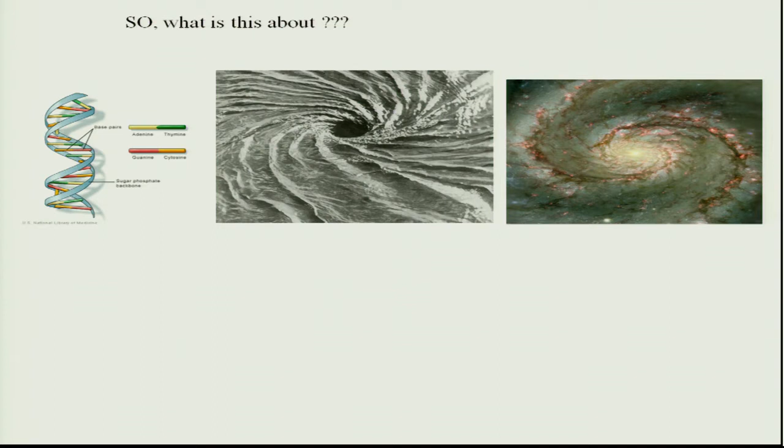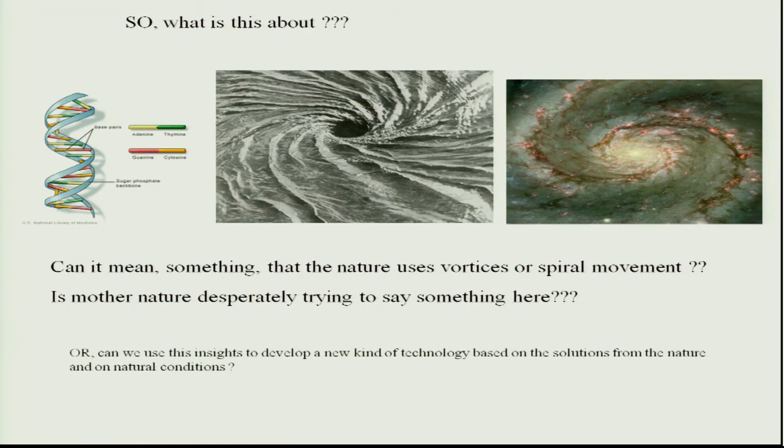And then we look out in the universe to see some of the biggest objects we can observe. They all have one thing in common, namely the vortex movement. So we started to think, is Mother Nature trying to tell us something? Why is Mother Nature using the vortex as some kind of general design principle? Or can we use these insights to create a new kind of technology that is based on nature, and to create technology that works better in the future with better maintenance?

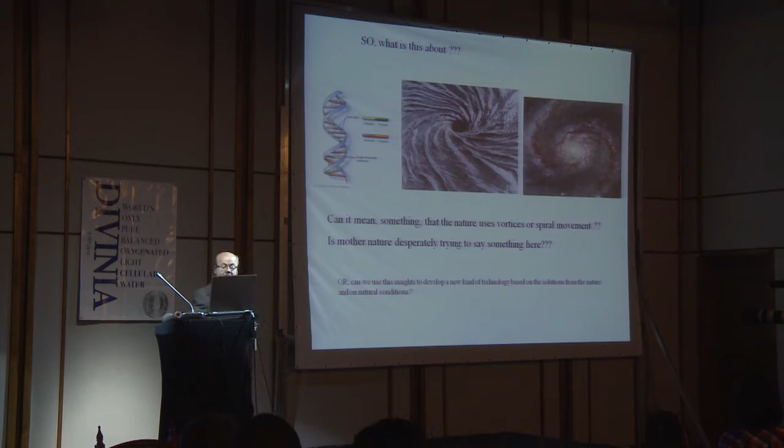So, have you ever drunk tea or coffee? Here's the problem: there is a glass bowl filled with water and a lot of dirty stuff inside it. If you want to clean the water, what should we do? I mean, you can pick them out one by one, but it takes an awful lot of time. But you can also do like this.

I'll start to stir the liquid, and look what's happening. Look at the similarity between this and the spiral galaxies. Here we are again. This means that in this state, it's much easier to pick the stuff out. It's coffee, used coffee ground.

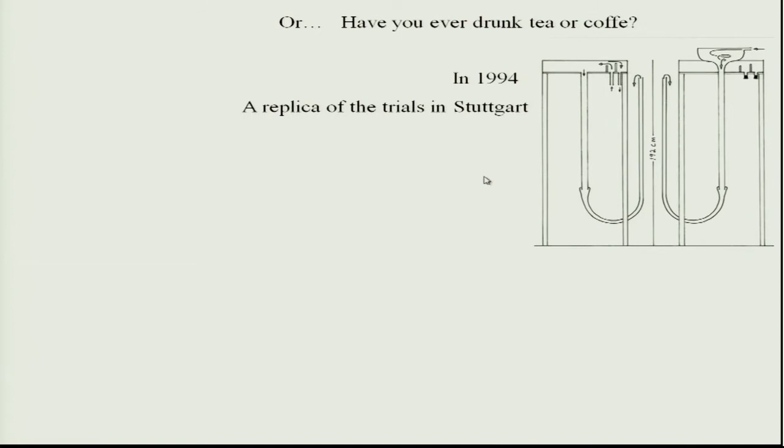In 1994, we started to think we must do something with this. We must make a replica of one of these things to see if we might get it to work. This is one part of the famous trials in Stuttgart. We're trying to find out, does the vortex shape itself on its own, or does it need a bit of help? The answer was that the vortex is actually creating itself. It's a kind of self-organization system.

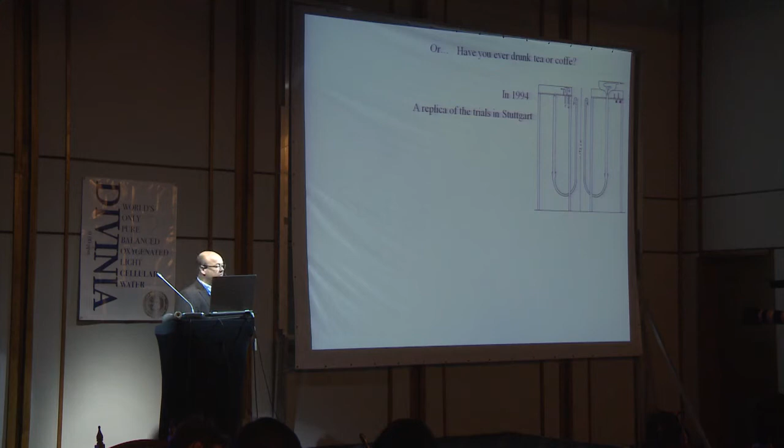And then we have a small tube attached in the center. You apply a very little underpressure, and they link together. So you're actually able to pick out most of the stuff in the water through the tube, and what's coming out afterwards is more or less clean water. If you do it more times, you're sort of polishing the water.

So then we invented, or named, something we call VPT. VPT stands for Vortex Process Technology. And the idea behind it, as I said, is to study nature, how nature does things when it does technical things.

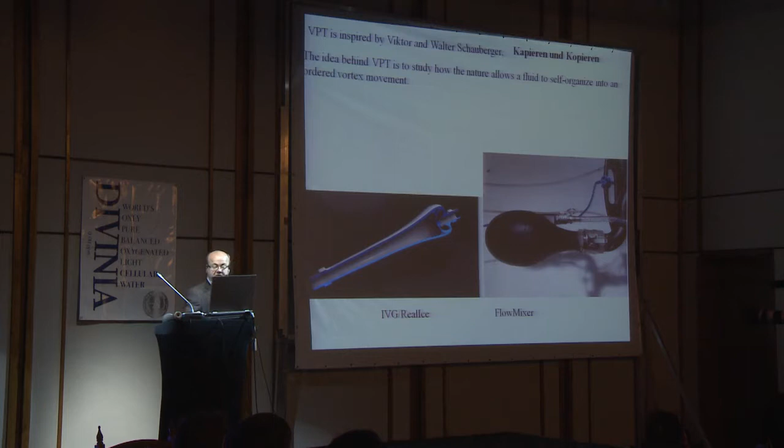It's also fundamental in nature. We saw that you can find it almost everywhere, from our smallest things to the biggest things out there.

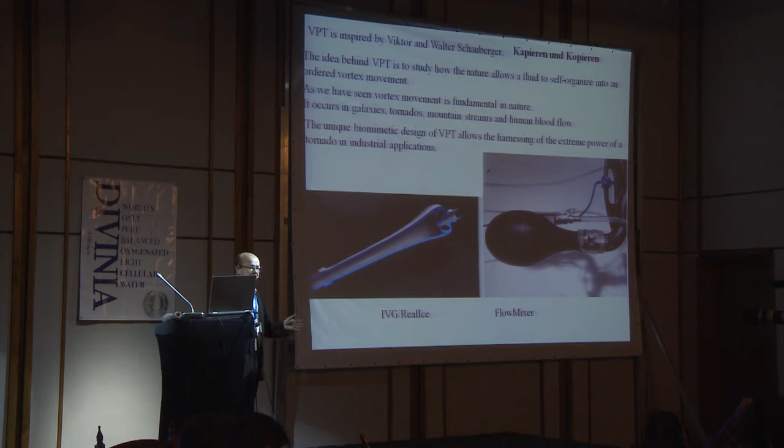And also, this biomimetic design allows us to harness the extreme power of a tornado for industrial applications. We just say it might even be able to use this with air. Suppose you can tame a tornado and extract the energy from that. Wouldn't that be cool?

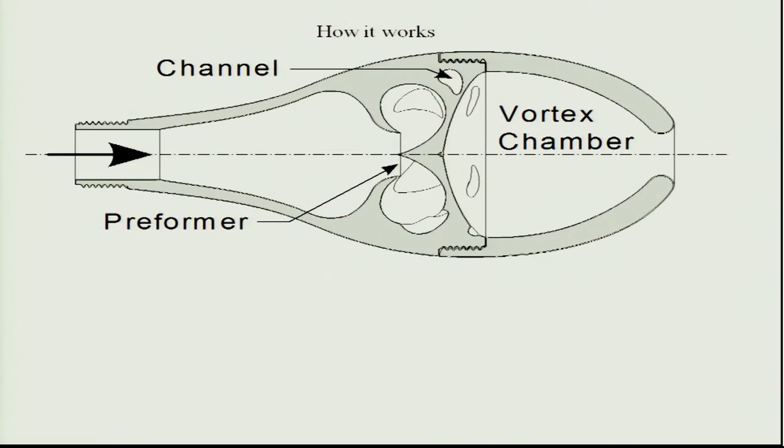This is how it works. You have the water coming in from beneath. It meets this sharp point. It flows out in a torus-like form. It starts to circulate, it goes into the canals and goes out here. We have 5 canals, and together they shape a main vortex inside the vortex chamber.

We have different sizes, different sorts of designs for different purposes.

In this case, the vortex comes out here and goes backwards, creating a subpressure in the center. In this case, the subpressure is connected via a small tube up to the air, so this one is running underwater. It's a very efficient way of mixing oxygen or air into water. So you can mix a liquid with a liquid, with a gas, with a liquid, even a liquid with powder.

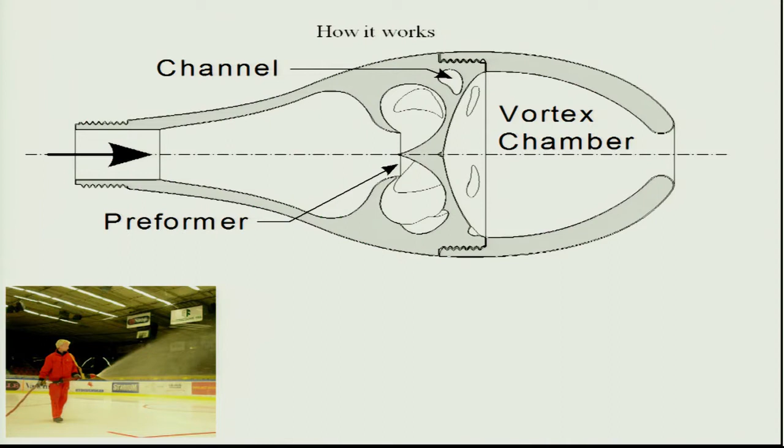And we use it for various purposes, which I will show you later. It could also be used very effectively to spray out things. In this case, to make ice on artificial ice arenas.

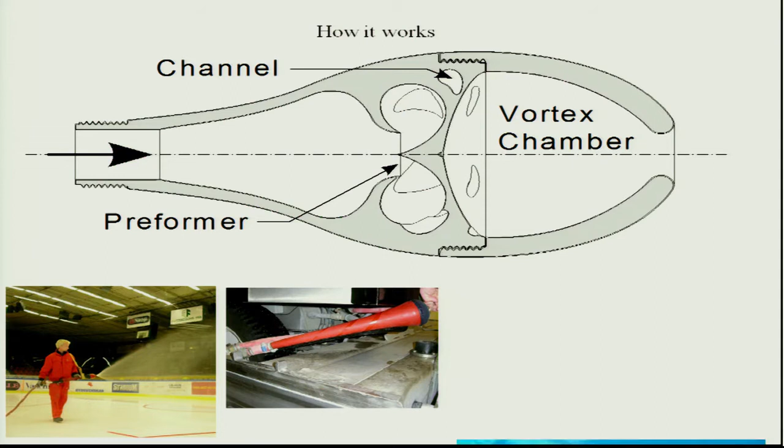And this is another type, a very early version that we put on the machine that goes around the ice when they're fixing it. This is how it looks underwater, where the bubbles are coming out. You can see this little ring is a cavitation ring. The pressure is so low that the water actually rips apart.

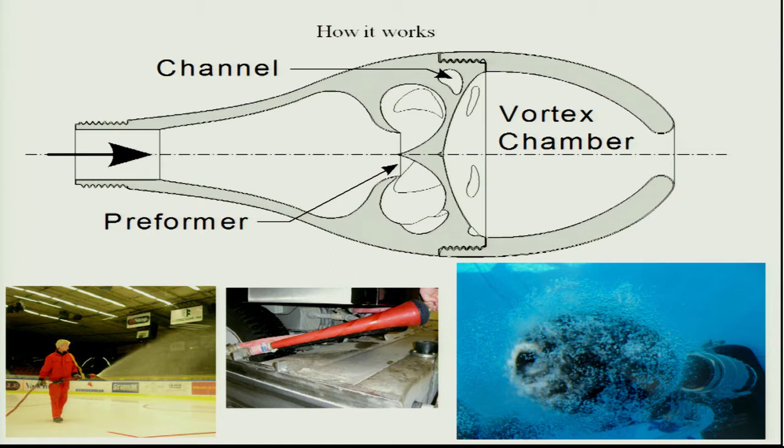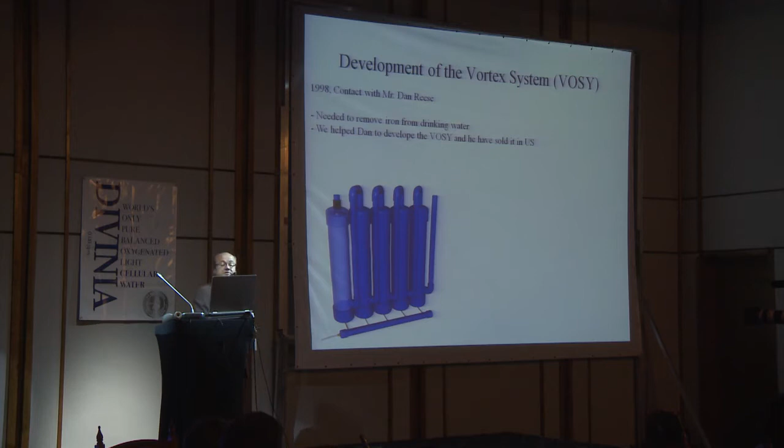Then later on, we developed something we call the vortex system. We came in contact with Mr. Dan Reese from Texas, US. He had a problem: he wanted to remove iron and manganese out of drinking water. He had another system, but it didn't work very well. So we helped Dan develop VOSY, and he has sold it in US ever since.

And this is how it works. Same thing: you have a nozzle up here, the water comes in, starts to spiral inside the tube, and the dirty stuff goes out in the center, and the clean stuff goes out into the next tube. We repeat it 5 times. With this, it's possible to remove around 50% of the iron, depending a little on how bad the water is, and almost 100% of the manganese.

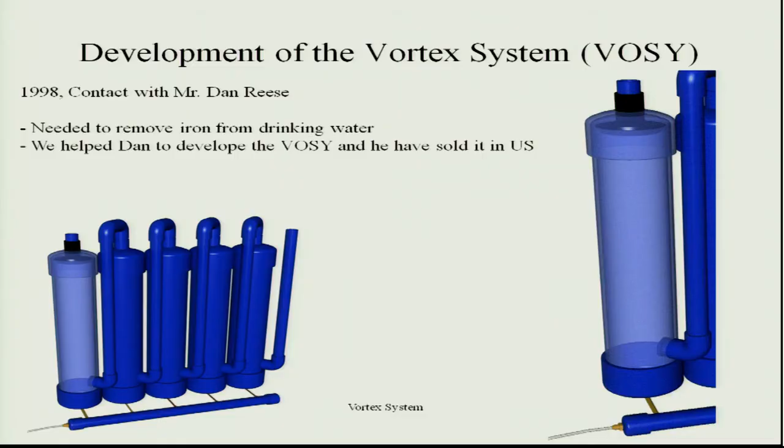So I would say it works with any kind of metal ion. Could be a solution for Fukushima, I don't know, maybe.

We have just tested it with iron and manganese, probably other things like lead or whatever. The reason it actually works so good is that the material happened to be PVC. PVC is strongly electronegative, it wants to give away an electron. Now, the iron that comes in is positive, it wants to have an electron. So when the iron is rubbed against the walls, it steals an electron.

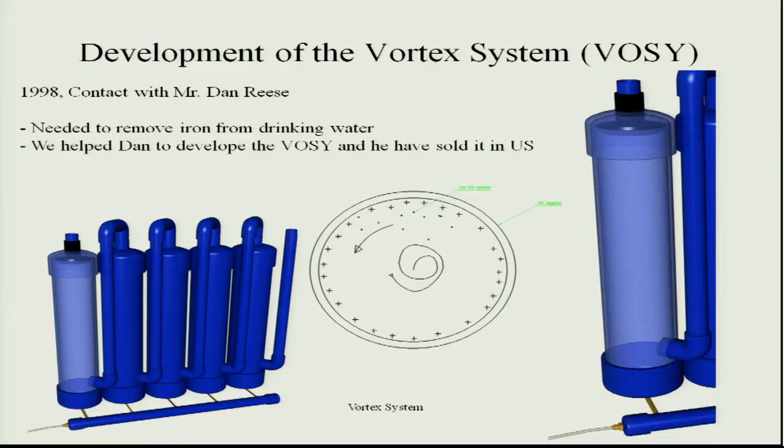After a while, you build up a very strong positive field, could be around 200 to 300,000 volts. Meaning that the next iron that comes in will be sort of repelled by that positive field, and it goes towards the center, where you have the weakest spot. And that's exactly where we want it, because then the vortex takes over and sucks it out.

So this is also a typical way of how nature works. Nature works with many different ways to solve things, but they combine. That's why nature is so effective compared to our own systems.

However, something funny happened. The plants grow better. We got reports from people using this stuff and watering the plants with our water, and they say, hey, they grow better. And we say, what the heck?

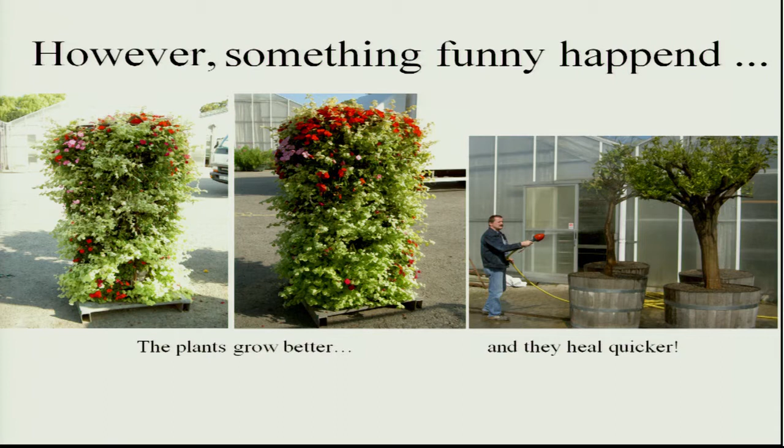You can see we put up something called blomster pillars. This one has been standing beside this one all the summer. This one was watered with ordinary tap water, and this one was watered with vortex water. And you can clearly see that there's a big difference between them.

And also, they heal quicker. My friend Morten here is spraying water on a lemon tree that has some kind of disease, and it healed much faster than they expected it to do. So this gave us something to really think about, what's going on.

And this also led us to make some bigger tests. We have made tests with soil penetration, wetting abilities and solubilities by farming in greenhouses, first in Dubai, where we tested with cucumbers, and in Alnarp, Sweden — Alnarp is a Swedish agricultural university just north of Malmö — with tomatoes.

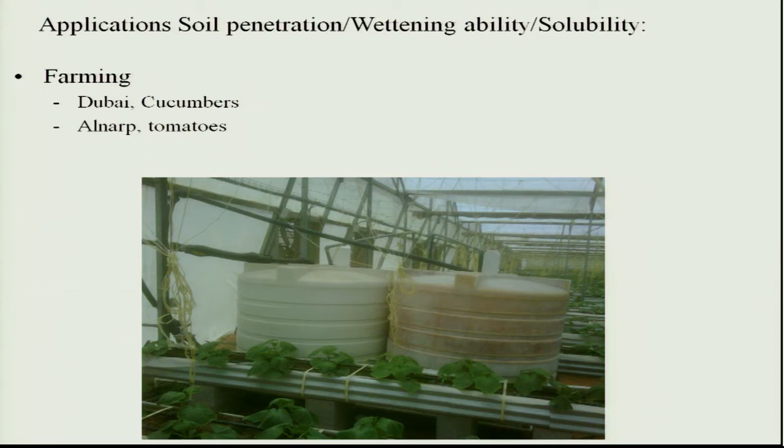The objective was to see if something was happening, and if so, what. This is how it looked in Dubai: basically two barrels of water, one barrel with vortex water, one barrel without vortex water. And this is how it looks at the end of the growing season — this one is with vortex water, and the other one is with non-vortex water.

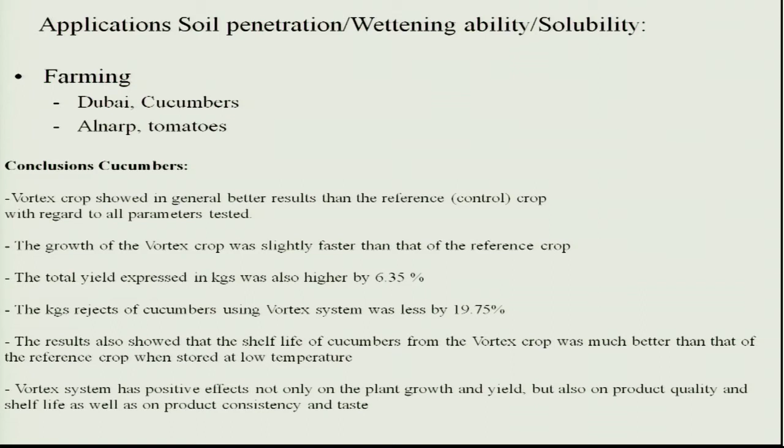And the results were that the crop grows slightly faster with vortex water, but the total yield when they harvested the crops was about plus 6.35%. However, the quality seemed to be better — the number of rejects was less by almost 20%.

And also one other thing that really amazed us was that the shelf life of the cucumbers, when they lie in the shop, is about 20% longer than the other cucumbers.

And in Alnarp, they made a small hydroponic-like test with tomatoes. This girl, Malin, took the seeds and followed them from the very beginning up to 7 weeks. It seems that things are really happening here as well, because her thesis was that nothing would really happen — so there wouldn't be any difference.

But the plant height, the stem width, and the internodal length — the length between the leaves — was significantly bigger in the tomato plants with processed water.

And also, we found out that the vortex water tomatoes seem to be more stress tolerant, because she made an error in the first round. She took the small plants into the big bio chamber when it was extremely light, and they got a light shock. But the plants with the vortex water seemed to recover much quicker than the other one.

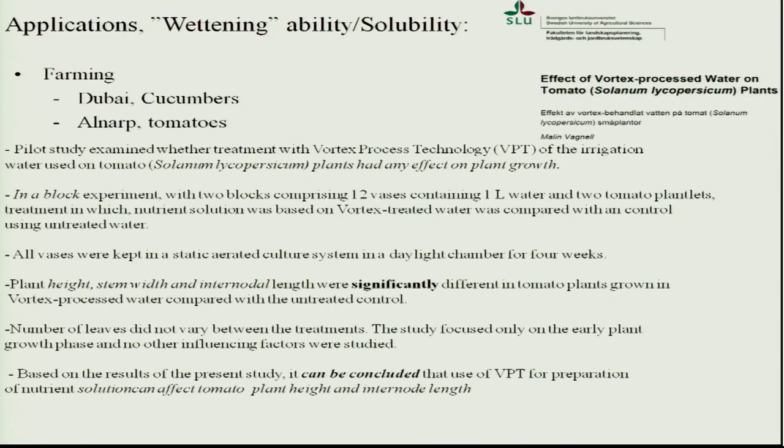And she concluded that, well, if you use VPT for preparation of the nutrient solutions, it can affect tomato plants. So she had to change her mind, which was a victory for us. However, this is a pioneer project that raises more questions than it actually answers.

So there we are — things are happening with watering the plants, and this is something that could be used for, say, irrigation, a more effective irrigation. We made a very quick field test at Capdepera golf course in Mallorca, where the main conclusion was that we could save somewhere between 30 and 50% of the water used for the golf course, which is a lot.

Another application where we use the subpressure method, you see how this one looks. The other one is used for other purposes, and you see it looks slightly different. The reason is that we want another type of vortex inside.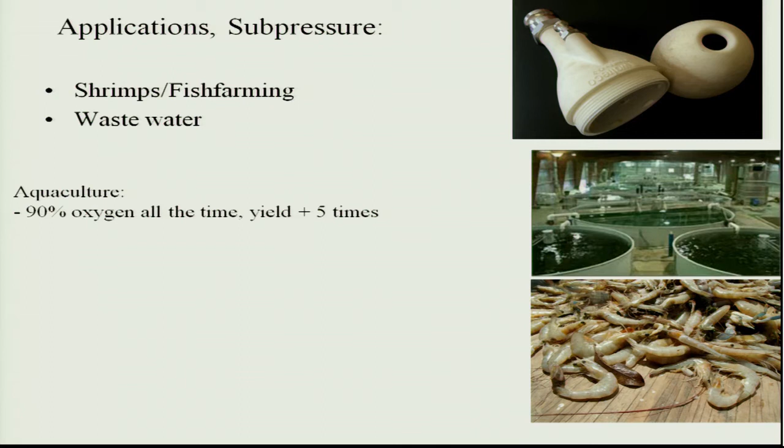This should be more elongated, and it's for inline on the water line. This one could be used for shrimp and fish farming, for wastewater, and if you can maintain 90% oxygen saturation all the time, you will increase the yield by 5 times for shrimps, as an example.

And for wastewater, we have this system here. They're processing water from red beets, and it contains a lot of fat, and that water should be used for a biogas digester, so they want to get rid of the fat. The problem was that the fat has very small fat bubbles, and they want to get them away from the water. So we put this one into the water, and it bubbles up, and it lifts up all the fat bubbles so they can be skimmed off later on.

This is a biobed, something called a bioblock. It consists of plastic tubes, formed like a net, with a very high surface. They put it into the water, let water come from beneath up, and they plant plants in it. This could actually take care of basically any kind of pollutant water.

They have a plant in Malmö, at Alnarp, by the way, where they have black water coming from 50 persons. The only thing they do is have a pre-system where they take care of all the bigger parts, and the rest comes into this. Afterward, you can actually drink the water. You only have plants and bacteria inside that take care of it. I've done it, I've survived.

You also get less swelling of filament bacteria in wastewater plants. Sometimes you have a problem with bacteria that overgrows and fills the complete plant, and that tendency has gone down. You also have improved sedimentation, and of course, higher oxygen levels.

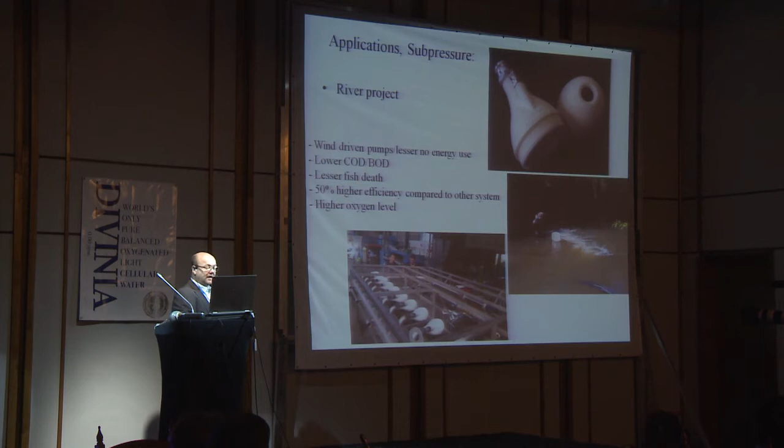We have a river project right now going on in Holland, in the River Dommel near Eindhoven, where we have a system with 10 of these connected in parallel, put into the water. This is how it looks, and this guy is actually standing on this. We call it a skid, it's kind of a metal box.

The reason is that when they have a lot of rain, it causes BOD, COD coming into the water, consuming the oxygen, and fish are dying, and the river stinks. So they want to prevent that. In some strategic spots, they will have a couple of these systems. They will run like hell for a couple of days, then turn off for the rest of the year, in order to prevent the oxygen levels from dropping.

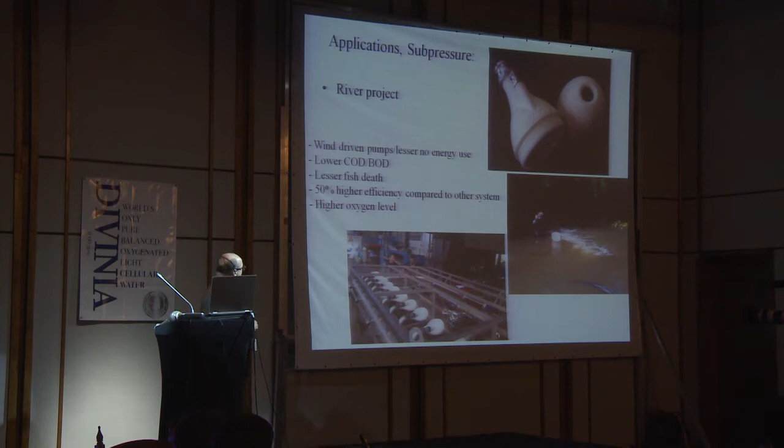So right now we are delivering a bigger system which will be able to put down 250 kilos of oxygen every hour into the water, which is a lot. And this system uses about 50% lower energy compared to similar systems like propeller injectors and membrane aerators.

Also, we have anti-algae. That was actually how it started. This is my pond at my home, and we have this little green problem here called algae. I got tired of hauling out some 20 kilos of algae every third day during the summer, so I thought I must do something about it. So this is the problem.

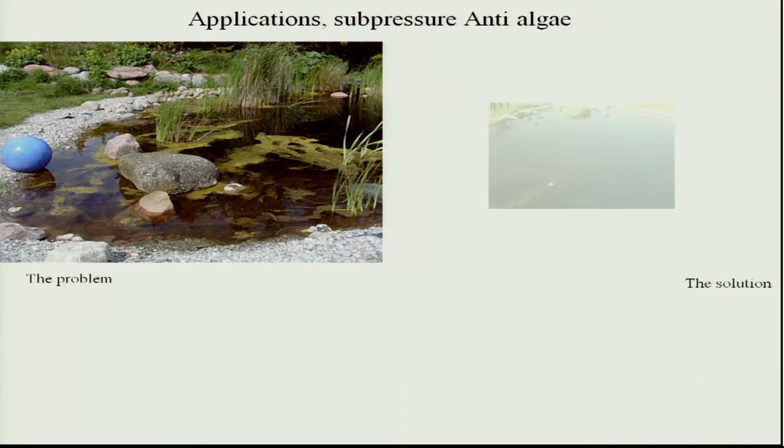And here is the solution. It's one of these small ones, you can see it is a red one there. I can see the bubbles. And this is after 3 weeks. No chemicals, just pump a little water. And the pumps can be wind-driven, so basically you can do it without any external energy.

So the results here are wind-driven pumps, no chemicals, no death of fish, and the ponds are more beautiful. This is also applied in the city of Malmö. We have a lot of them around in the municipal ponds.

The next thing is crystallization. We found out in Malmö we have a lot of calcium in the water, and calcium has a tendency to clog on the sides of the pipes, called lime scaling.

I would like to show you another phenomenon where we actually freeze water. This side is vortex water, and the other side here is tap water. Let's see if this works. Take some time.

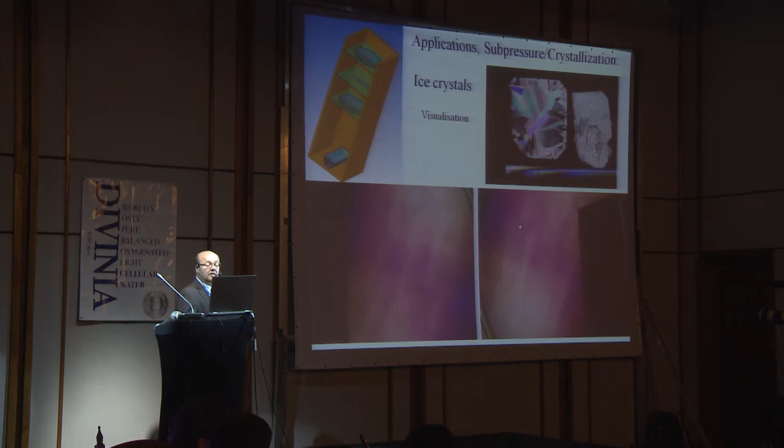I have to synchronize them, and you can see what's happening here. Here we add the water, it's in the freezer. Look what's happened with the vortex water here - it freezes directly, almost. It freezes a little bit slower on the other side, but this one hasn't started yet. You wait, and you can see how the crystals are growing here. Very beautiful crystals, look like feathers from a bird or something.

Within a couple of seconds, you see how it starts here. It's about 45 seconds difference between them. I think the camera doesn't like the minus 20 degrees temperature. I'm trying to focus.

Watch out now - there, it freezes almost instantly. But it took a much longer time before it started to freeze on the other side. This is probably because this water is subcooled - it goes below zero before it starts to freeze.

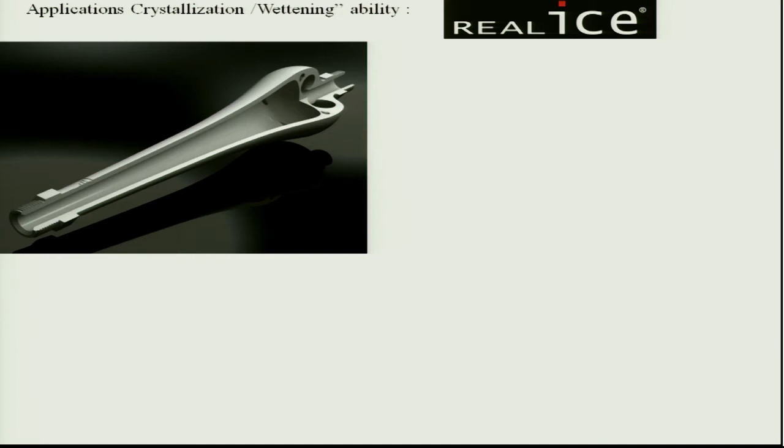Now, this is something we have used in another type of application called Real Ice, and this is how this one looks inside. Here is the preformer, here is the vortex chamber. And the geometry here is very, very important, because the vortex has a certain speed when it comes into the vortex chamber, and then it goes out with a high rotational speed.

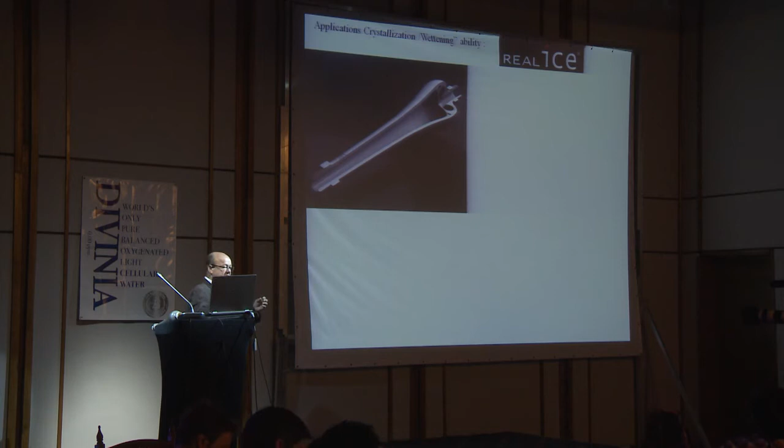This opening is smaller than the one up here, and this curve is a way of controlling the acceleration of the vortex. We want to keep it at certain levels, because if we accelerate it too quickly, you will get expansion force, and you lose that contracting central string.

So this is how the ice looks like, and this is how the system looks like. It's two systems - basically one system you put on the pipes, another system you use to spray out and build up the ice from the beginning. The results are: the ice is more durable, it freezes faster, as we saw earlier, and it's faster to skate on. And that's a very interesting thing, because no one has really been able to tell me why ice is slippery.

We all have ideas - we all know that ice is slippery, but why? We all have ideas that the friction of the skate and the ice melts the ice to water, and you slide on a film of water, also the pressures involved. But the equations and the models that describe this break down at minus 27 degrees Celsius, and people are skating and skiing in lower temperatures than that.

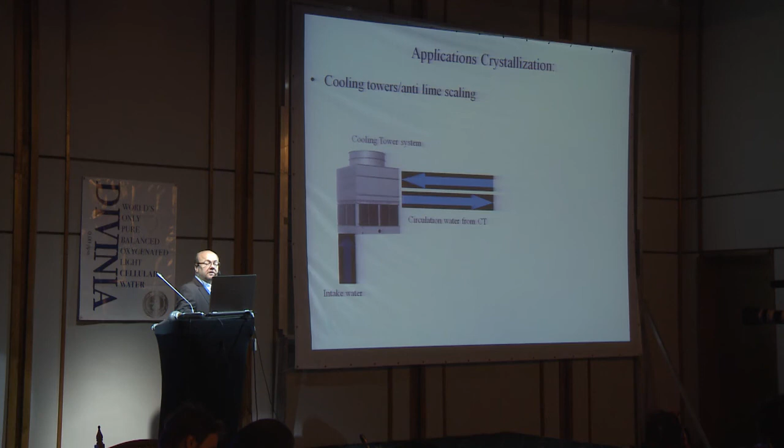Then we get into another crystallization process: cooling towers. A cooling tower is a big funnel with tubes inside that need to be cooled. You pump a lot of air through it, which works fine in winter, but in summer when it's hot, you need to spray water on it. If you have calcium in the water, it will stick to the tubes, and half a millimeter cuts away somewhere between 7 and 10% of efficiency. This means they use a lot of chemicals—acid, antibacterial agents, anti-algae agents. So we made a system, call it a skid or cooling tower skid, where you have our small vortex, a pump, and some other filters and stuff.

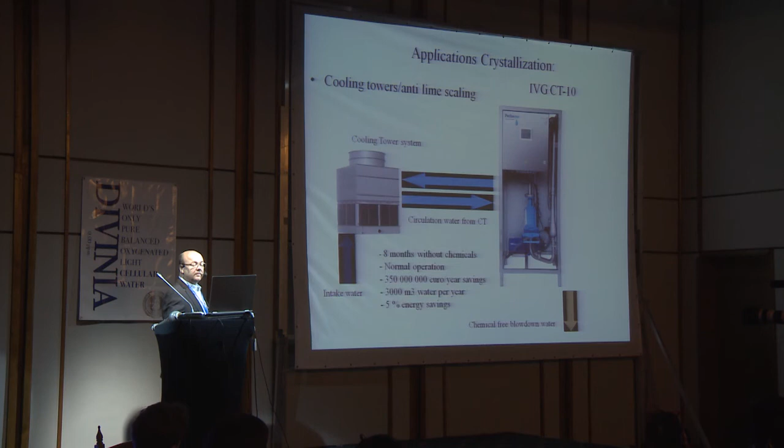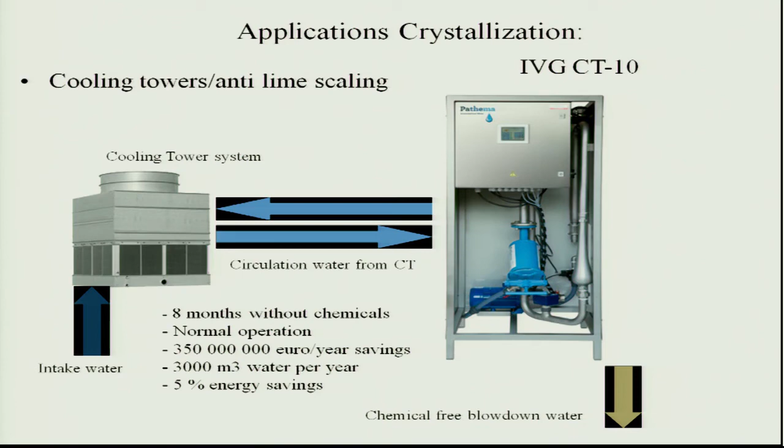You get basically chemically-free blow-down water from it. You fill it up, run it for a while, and then exchange the water. We tested this at the Heineken Brewery in Holland. They ran it for 8 months without any chemicals at all. It worked perfectly—normal operation worked perfectly. So here we replace chemistry with physics.

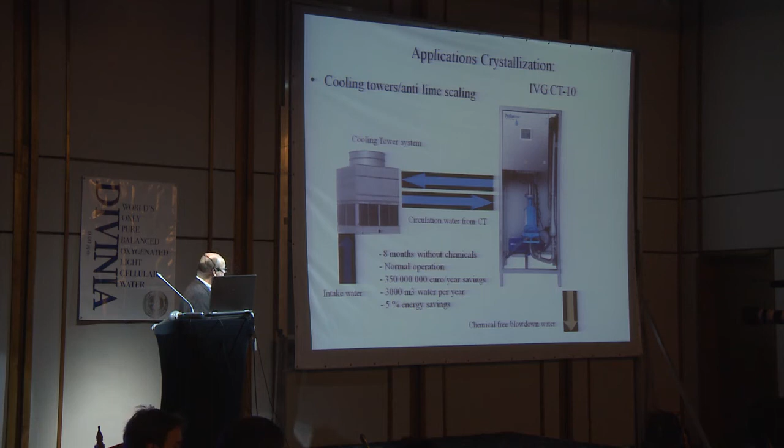Fully implemented across Heineken Brewery industries, they could save about 350 million euro per year with reduced environmental costs. We've also been testing further in the US, where we found it's possible to save around 3,000 cubic meters per year per installed megawatt. Fully implemented in California, which has around 500,000 cooling towers, this technique alone should save somewhere between 7 and 8% of California's total water consumption. That actually fulfills Governor Brown's norms, what he has stated.

We also have a small amount of energy saving because the system is always clean, so it's always running at full efficiency, more or less.

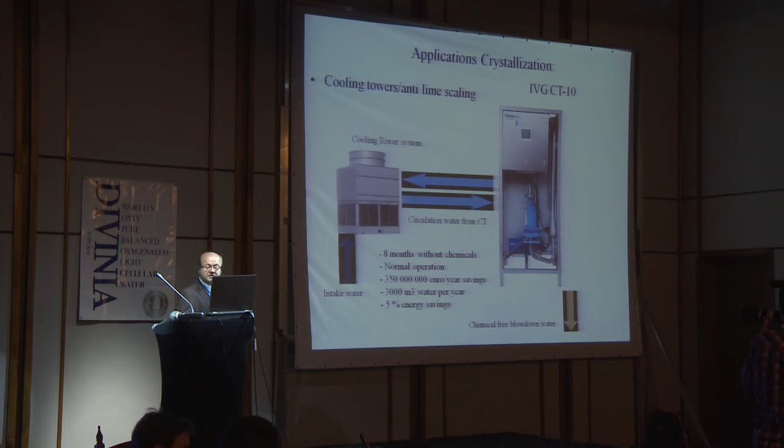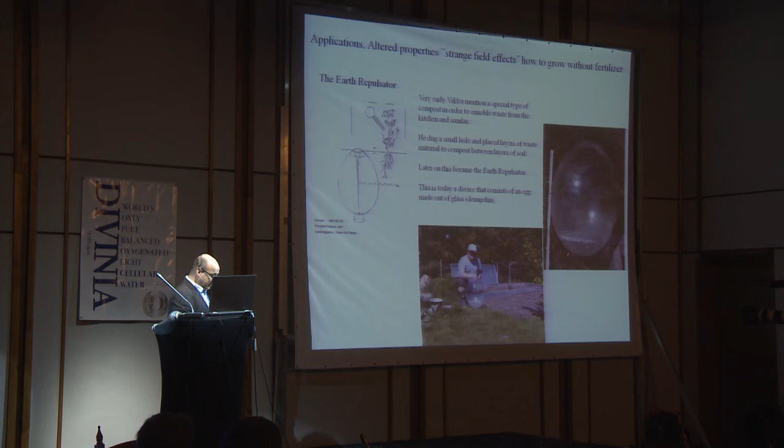We also found something we call strange field effects, which we really cannot explain. Maybe some of you will figure it out later. It makes it possible to grow plants without fertilizer. It's something Schauberger called the Earth Repulsator. It's a glass egg—you dig it into the ground so a little part of the top sticks up, fill it with rainwater, cover it with plastic, and let the sun shine on it. Then there is some kind of energy emitting from that, so the plants grow better around it.

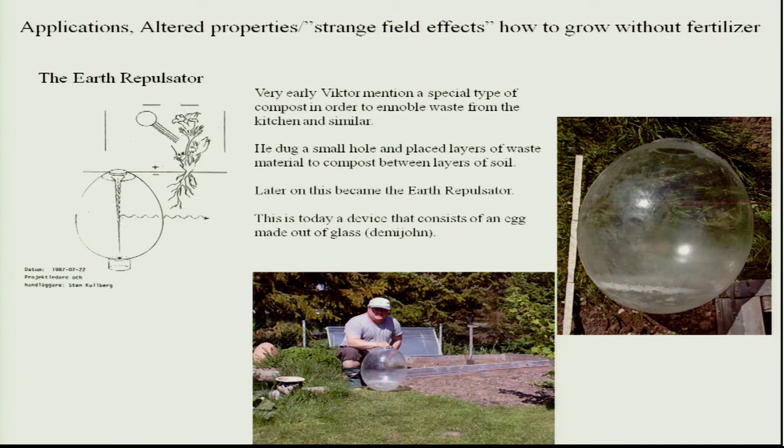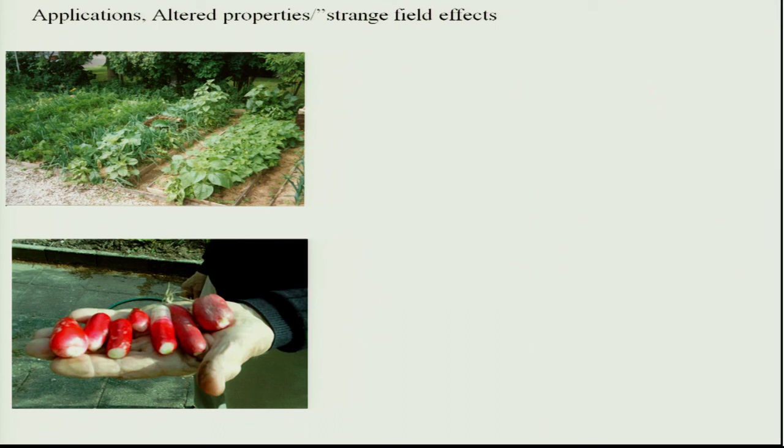And this is the result. Here you have the water generator, and here the other crops. Down here, these five are 1.5 weeks old, and to the right, these two are 7 weeks old. So they can be compared.

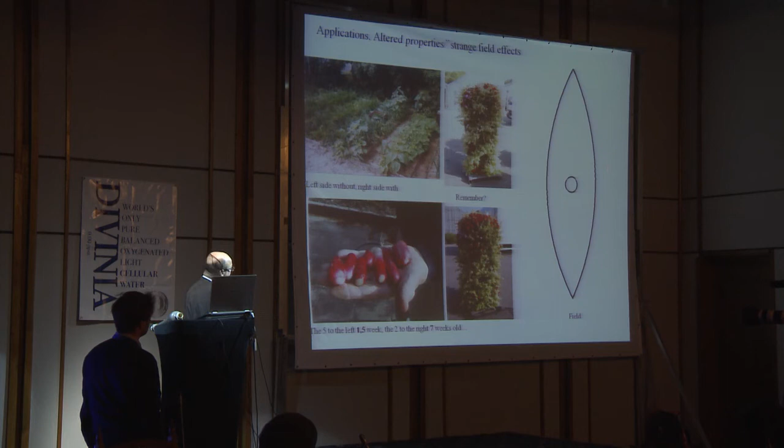And you remember this effect? This is how the field looks—oriented in a north-south direction, about 7 to 8 meters in one direction, about 3 to 4 meters in the other. I can't explain why, but the observation is there. We've done it many times. I have tested it at 42 different places, and it works. If you want, you can get the recipe on how to do it later on.

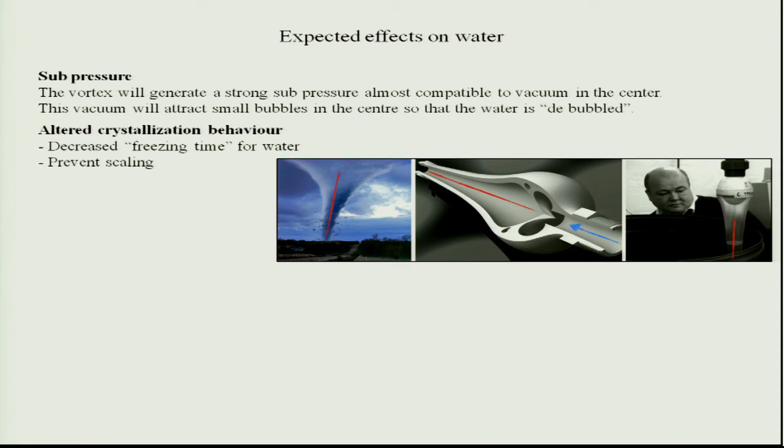So to sum up, the expected effects on water: I measured subpressure for various applications, altered crystallization behavior. We also found altered properties of the water, such as wetting ability—the water's ability to wet surfaces, an interaction between the surface and the water, which we use in the ice example.

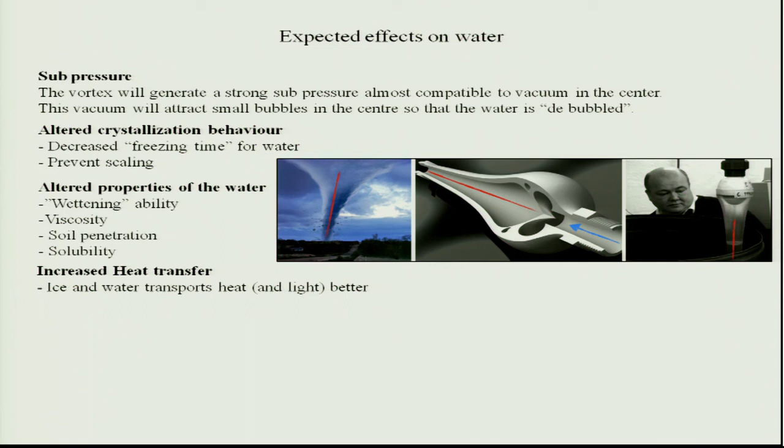We found that viscosity goes down somewhere between 3 and 17%. We have better soil penetration, better solubility, so the tendency to dissolve things increases as well. We have increased heat transfer, so the water and ice transport heat and light better. Increased heat capacity is interesting—the water's capacity to store energy increases by up to about 10%. And I thought heat capacity was constant.

Separation effects, as we have seen, and also these strange field effects - this is what we have found so far that we are actually using. So that's the sort of summing up of my findings.

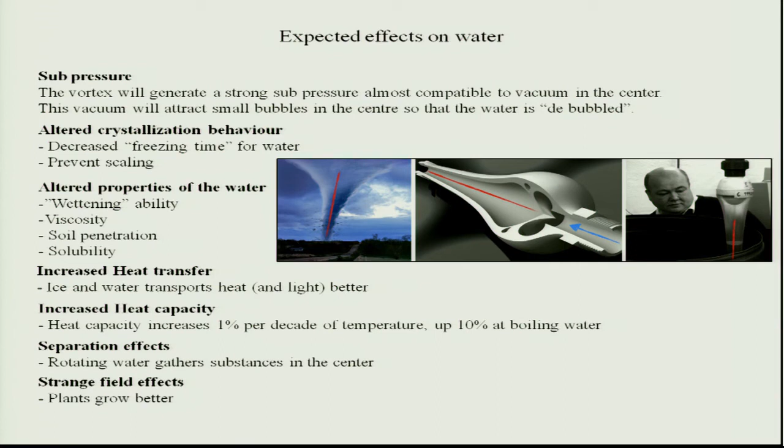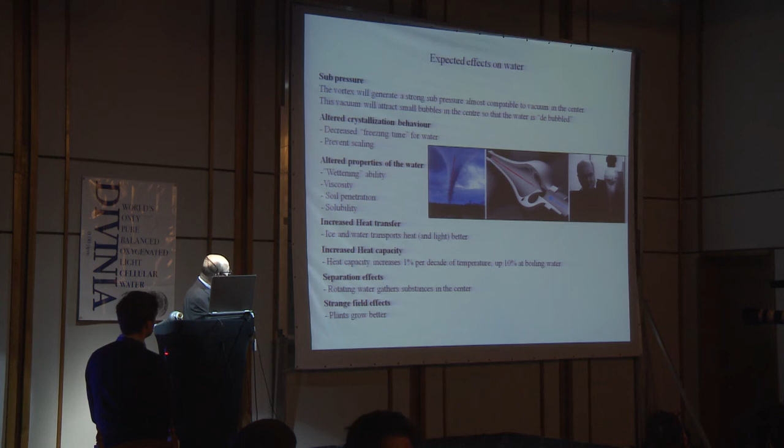And this is beautiful pictures when we show the center string inside a tornado, inside one of our tubes. And it's this little transparent device - you can actually see the bubbles in the center of the vortex.